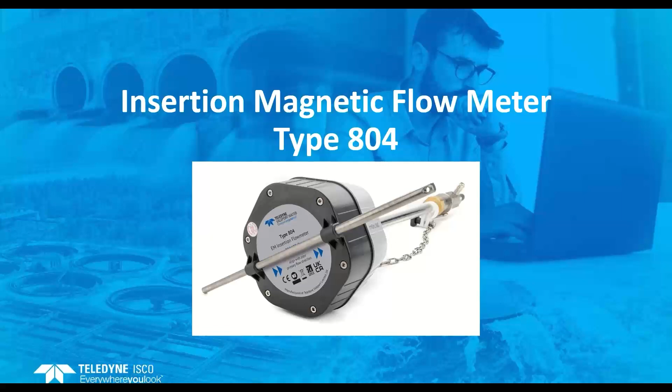Thank you, Kaushal. My name's Matt Brownhill. I've been with Teledyne ISCO for about 5 years now, and I'm the UK Regional Manager. As Kaushal mentioned, we are focusing today on two key products that enhance Teledyne ISCO's product portfolio: the Type 801 handheld velocity current meter, but first up I will be speaking about the Type 804, which is an insertion magnetic flow meter.

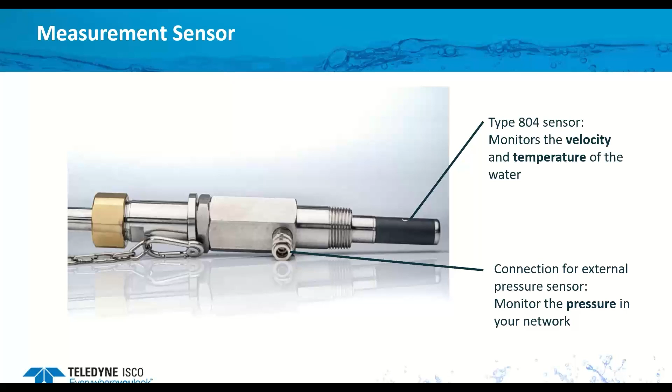So the sensor has three measurement points. The tip has a velocity and a temperature sensor, and in addition to this we have an optional external pressure connection, which is located just above the tip there.

So the principle of operation for the velocity measurement: the sensor adopts Faraday's principle to read velocity. The sensor creates a magnetic field and an EMF voltage is then generated that's proportional to the velocity of the conductor. In this case, water is the conductor. The sensor is inserted into the pipeline, either at the center point or at a 1/8 diameter depth. This all depends on the application and the site specifics.

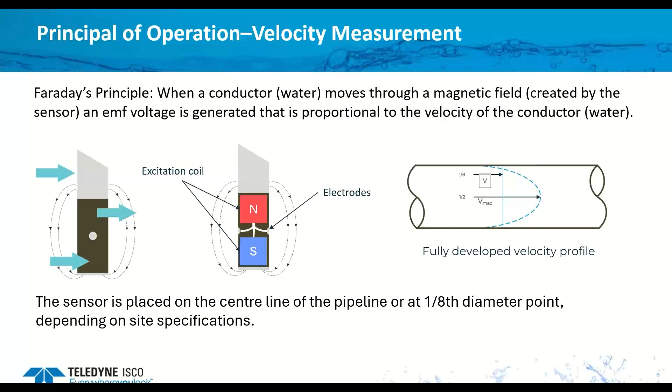Flow is then calculated from the velocity reading. We use a formula to calculate the flow rate: K multiplied by A multiplied by V. K is the constant, determined by multiple factors such as the insertion depth, the pipe size, the pipe shape, and it is generated via the software used when programming and commissioning the unit. A is the area, the internal cross-sectional area of the pipe, calculated from the pipe shape and the pipe diameter. V is the velocity measurement that is being measured by the sensor itself. Flow rate, Q, is then calculated and recorded by multiplying the constant, the area, and the velocity.

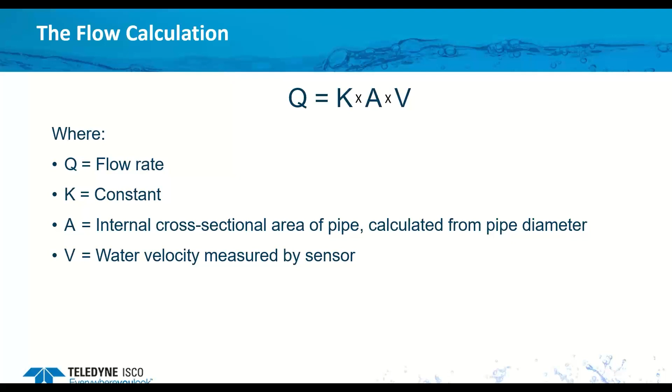So I'll go through the different parts of the Type 804 sensor. First up, you have the alignment spar, which is located right at the top. This can be used to align the sensor to be in line with the oncoming flow in the pipe. A safety chain is installed to prevent the sensor from being ejected from the pipe. This can cause damage to the sensor, or in a worst case, it could cause injury to the operators. So always use the safety chain.

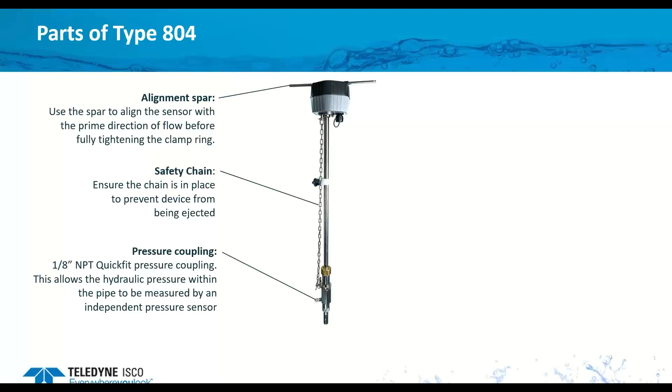There's a pressure coupling, which is external and sits outside the pipe. It enables the hydraulic pressures to be measured by an independent sensor if applicable. The sensor is the small black bit at the end with the circle on there, the electromagnetic sensor that is inserted into the pipe. At the top, you have the electronics, all located in the IP68 housing at the opposite end of the insertion rod. Then there's the connector, which can be used for external power and also for commissioning and programming the unit, in addition to downloading the data to laptops.

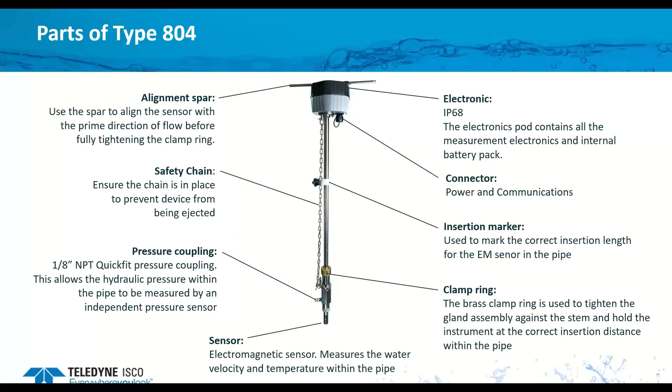Then a bit further down the rod, you have the insertion marker. This is used to mark the correct insertion length for when you're putting it into the pipe. Down at the bottom, you have a clamp ring, which is used to tighten against the insertion marker to ensure that the sensor remains at the correct depth inside the pipe.

Here's an example drawing of the sensor installed. You can see that the brass clamp ring is tight against the insertion marker. The safety chain is in place and the sensor has been inserted into the pipe with everything else remaining external to the channel.

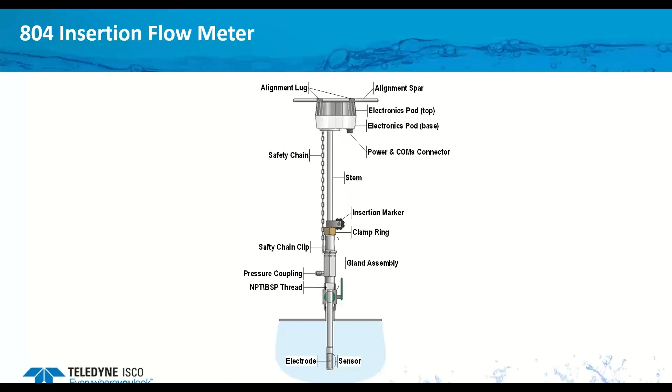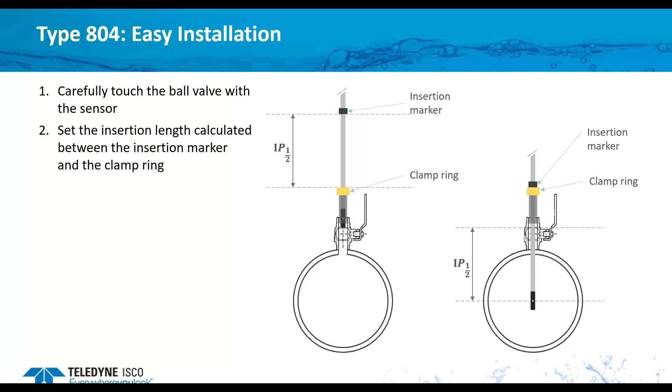Another example here of how to install the sensor. First, you carefully slide the sensor tip to touch the ball valve that is installed on the pipe. You then move the insertion marker to the set insertion length. This should be the length of half the pipe diameter between the clamp ring and the insertion marker, assuming that you are installing it in the center of the pipe.

Then you tighten the marker in place, and then you begin to slowly insert the sensor into the pipe until the clamp ring meets the insertion marker. Once they meet together, you can then tighten the ring to keep it in place, and then you align the sensor using the alignment spar on top of the IP enclosure.

Once that's done, you secure it with the safety chain, and then consider if you are installing at the 1/8 of the depth that you need, perform the steps above, but the initial step is calculated accordingly with the pipe diameters. So the insertion marker would be a bit lower down, and then you'd clamp it into a different position on the pipe depending on how far into the channel that you need to insert it.

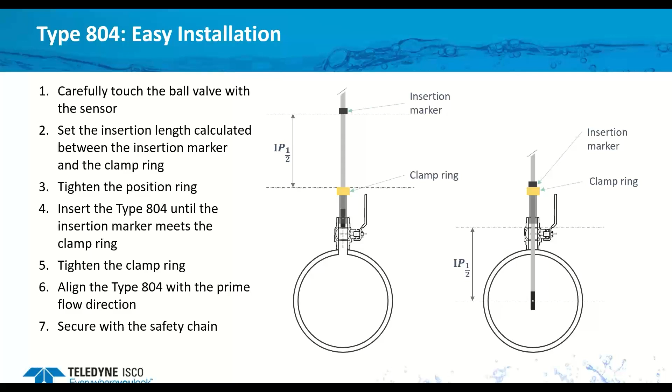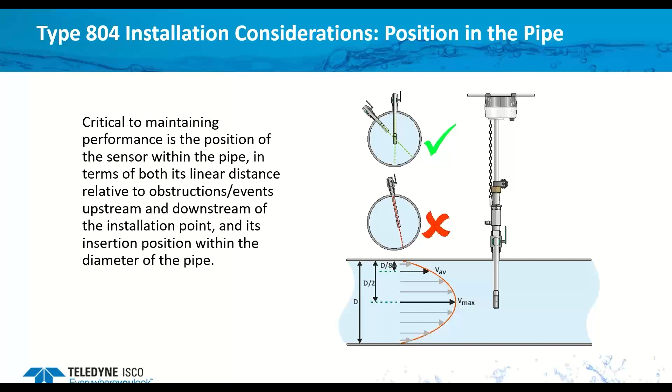Other considerations are obstructions upstream and downstream. As with many velocity measurement sensors, we need to consider both upstream and downstream obstructions. Downstream of the sensor in this application is generally 5 times the pipe diameters. Upstream does need further consideration, and it all depends on the application that you have.

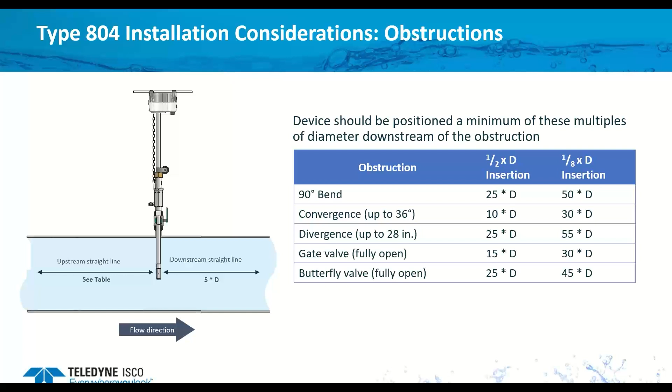The unit is extremely low powered with a typical battery life of around 4 years. The battery version uses two 19 amp hour lithium batteries. We also have analog and digital outputs available with open protocols that are compatible with many third-party loggers and SCADA or data acquisition systems.

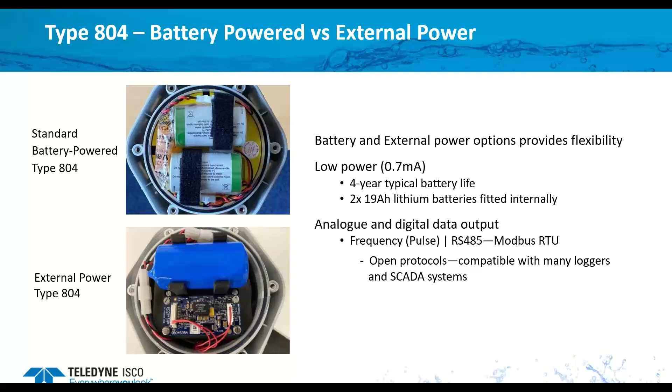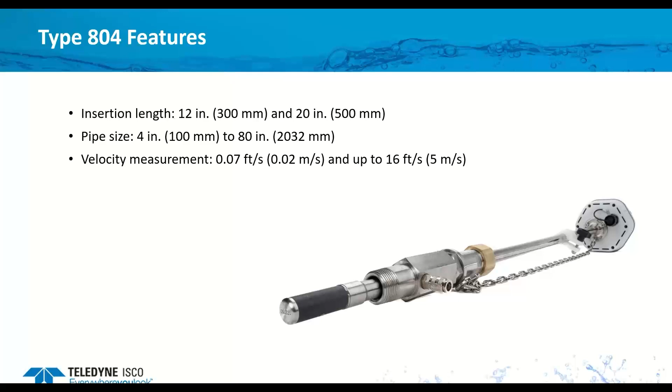This slide will summarize the sensor specifications. We offer two insertion lengths, 12 inches or 20 inches. This enables installs in pipes ranging from around 4 inches all the way up to 80 inches. The velocity measurement range is 0.07 feet per second up to 16 feet per second, and we have an accuracy of plus or minus 2%.

The sensor also has bidirectional flow capabilities, and it can be recorded to display the net totals. So if you do have reverse flows coming, the total volume will show the net total that's gone through the pipe or back up of the pipe. There's also an inbuilt temperature sensor and the optional pressure sensor coupling just above the tip.

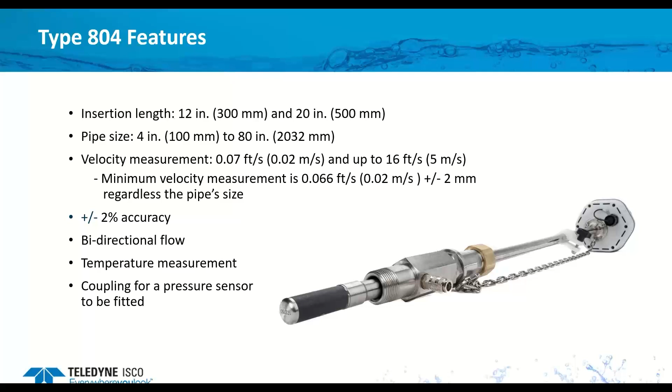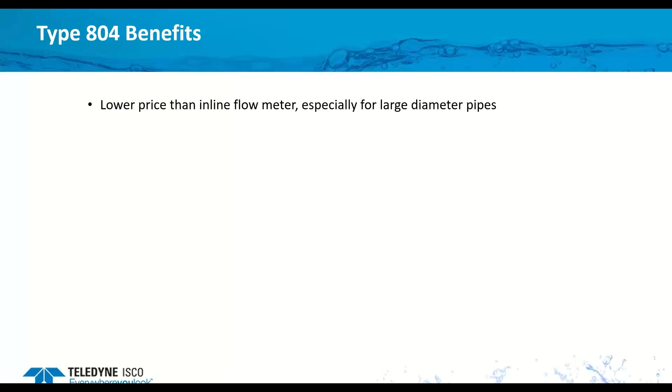So the benefits of using the 804 is it's lower cost than an inline flow meter such as a mag flow meter, especially in larger diameter pipes. There's also lower installation costs. It's a hot tap type installation, so you don't cut a section of the pipe out to install it.

This means that you don't have to stop the flows, empty the pipe, divert the flows, overpump, or anything like that. The cost implications, particularly in larger pipes for mag meter installations, can be extremely expensive.

Lower maintenance costs. Some issues you can see with inline flow meters are liner leakage, for example. The removal of the sensor is easy as well. It's carried out in live flow conditions, and in most cases just requires a sensor clean. Many inline flow meters require calibration back at base, so you have to remove it from the line and send it back to the factory, which introduces all the installation headaches mentioned above. With this system, it's just remove it and reinstall it.

So if you did need to put in a secondary sensor whilst that one goes back to the factory for calibration, you can just slide the new sensor straight back into the line. It also comes with a factory 3-year warranty as standard.

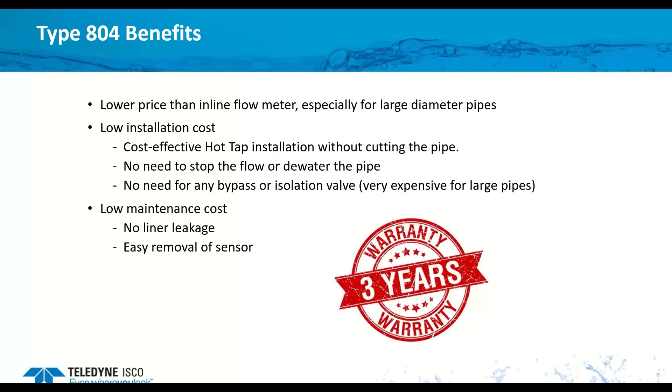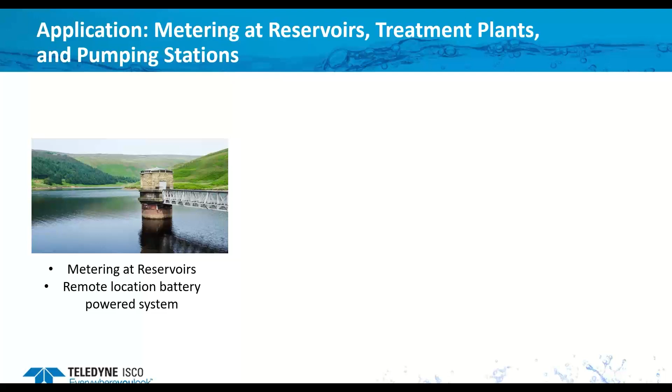I'll go into some application examples you can install. First, metering at reservoirs. Utilizing the battery power option in these remote locations, you don't need to feed any mains power to the unit. You've got a 4 year battery life, so it's ideal for those remote locations.

There's water treatment plants, which often have large pipes, and going back to the installations on inline meters, this can be a much more cost-effective solution.

And then pumping stations, so you'll have pump flows, usually have mains power available on these types of sites, so an external power option would be suitable. Again, you don't need to be cutting into the pipe, you can just install it straight into the pumped flows.

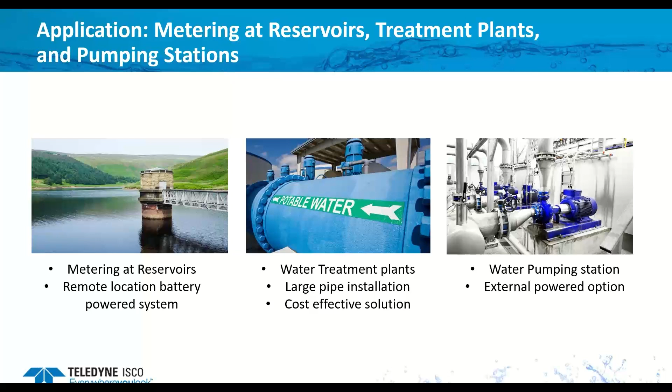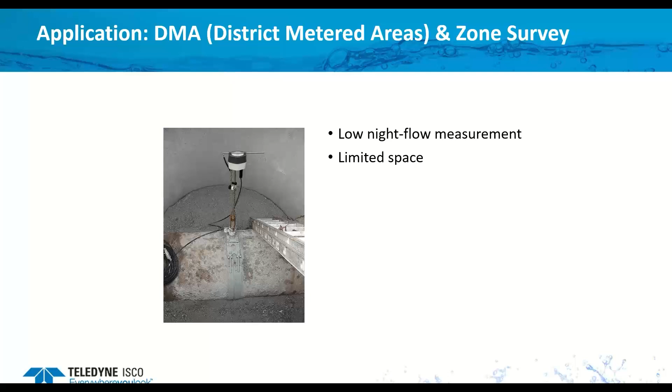Another example is DMA, district metered area. These types of areas typically have low nightly flow, limited space, usually inside a manhole with a pipe running through. It's an easy application, an easy installation even - you just slide it into the pipe using the non-return valves.

Power efficient, so with the battery option you install it, you don't need to run mains power, and it will log for around 4 years. Easy maintenance - remove it, clean it, insert a new sensor if this one needs to go back to the factory.

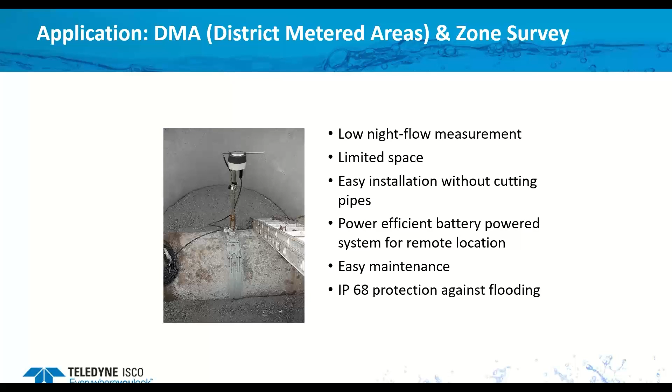The controller enclosure is IP68 rated, protecting in the event of flooding. So if the pipe did split for any reason, it's protected by the enclosure. And then there's the open protocol, as in this application here where there's a manhole chamber - if you can pull the data out to a SCADA or data acquisition system, it removes the need to enter that confined space to download the data.

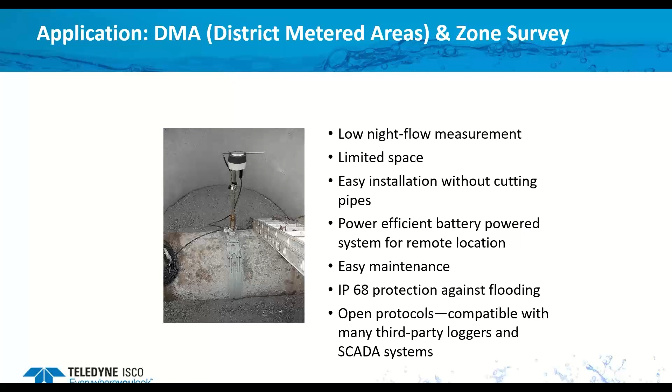It can also be used for non-revenue water or leak detection. Non-revenue water is water that is lost before it reaches the customer, and this is a huge problem. Most water utilities lose around 20% of their water as NRW. In 2007, the EPA estimated 1.7 trillion gallons of water was being lost per year, equivalent to around $2.6 billion. So it's a big problem.

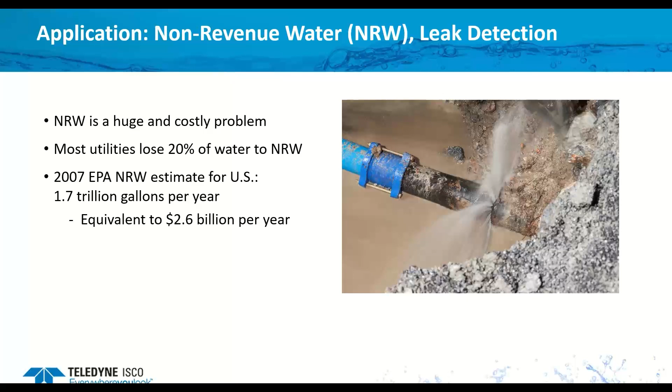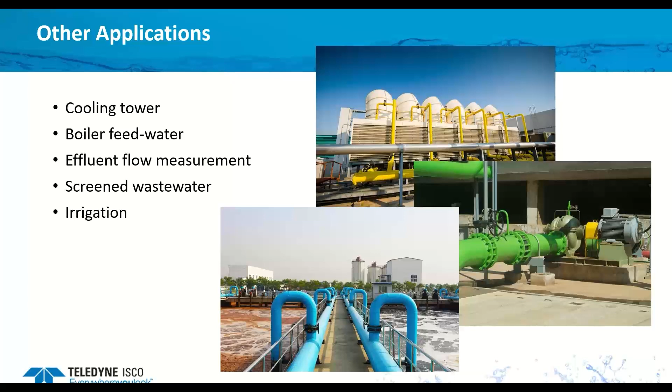So that's the 804. I'll move on now to the 801, which is a handheld current meter.

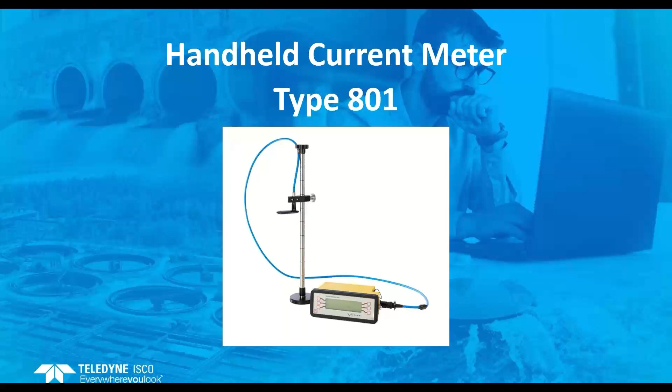The 801 system is made up of the following components: you have modular wading rods, which are for measuring the different depths of the water. The rods are around 20 inches in length and have half-inch increments so that the sensor can be positioned accordingly in the channel or the river.

There's two base options available. We have a flat disc, usually used in man-made channels which are nice and flat, or we have the pointed tip. This would enable you to dig the base into a riverbed or stream bed, so you can hold it in place more securely.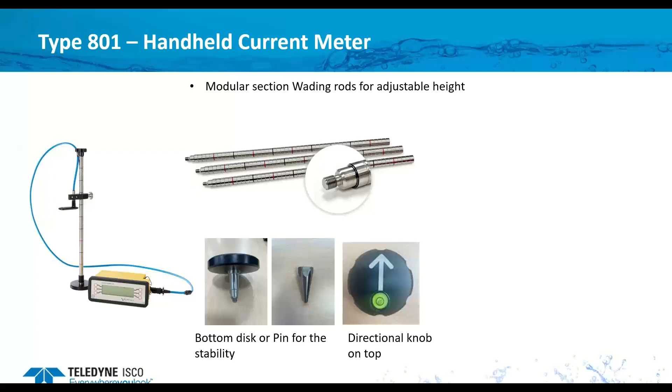At the top of the wading rods, you then have the directional knob. This is similar to the alignment spar that I mentioned on the 804. It enables you to point the sensor into the oncoming flow. It also features a spirit level, so you can ensure that the sensor is in a horizontal position.

Then we have the controller with an LCD display. Live readings can be shown. This also has data storage capabilities, which can be set and programmed to different logging rates. The controller comes with a shoulder strap, so if you're wading in the river, you don't have many hands to hold everything with. This can sit over your shoulder, so then you can have both hands on the wading rods.

And then all of the items, they come delivered in a purpose-built Peli case. This is easy for transportation and obviously storage. It all goes back in the box and on the shelf.

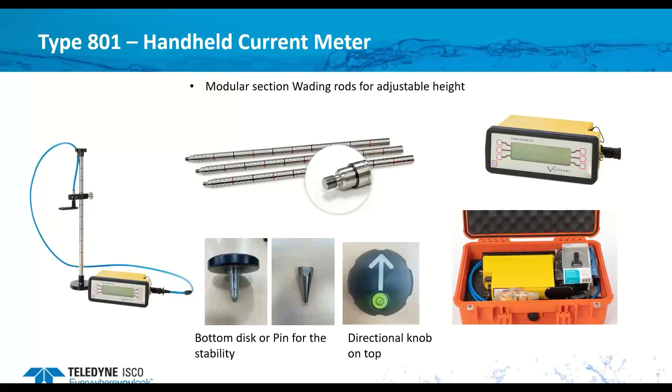The principle of operation is the same as the 804. It adopts Faraday's principle, although this is a velocity-only measurement. The sensor can be positioned at the desired location with the wading rod increments.

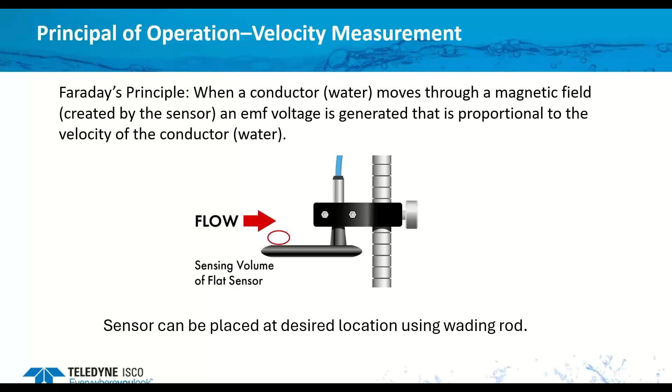You can see the increments there on that drawing. Each one of those is half an inch, and you can just raise or lower the sensor accordingly and tighten it back into position. And then the sensor should always point in the direction of the incoming flow.

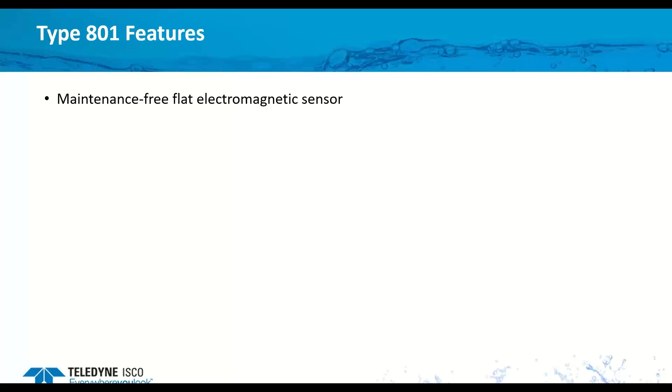So onto the features of the 801. It's a maintenance-free sensor — just wipe it clean, put it back in the box, and it's ready for next time. It has a velocity range of minus 16.4 to positive 16.4 feet per second. The accuracy is plus or minus 0.5%.

The minimum depth of water required for operation is 2 inches. The wading rods, as mentioned, are modular. They have threaded ends to adjust the height accordingly, and you can keep connecting these to the desired length.

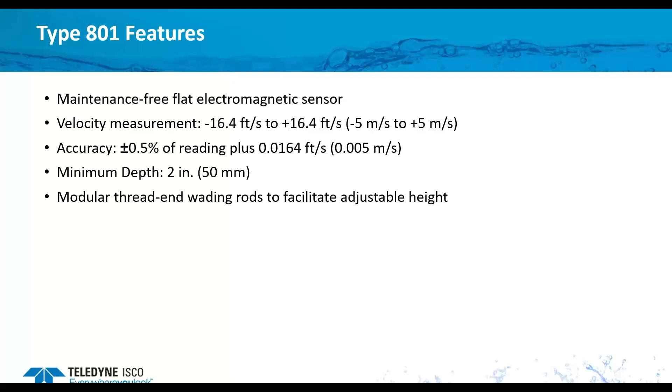The controller is easy to program. It has onboard data storage. It's also handheld. It displays live readings if you don't need the data storage. If you're just looking for spot readings, it's got that display on there as well.

And it comes in 2 different cable lengths. You've got a 6-foot cable length, which is for measuring velocity whilst you're standing in the channel, such as a shallow river or a stream if you're wading through it. Or we have the 20-foot cable length, which is more for when you're taking readings off a bridge or maybe above an underground sewer in a manhole or something like that. So you've got the wading rods and the extra cable length to reach down to the water.

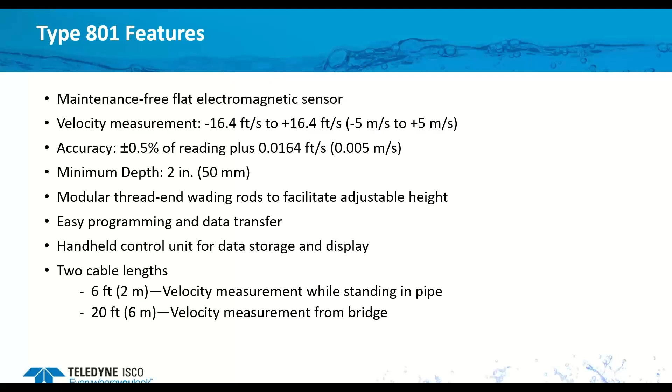The applications, two main applications, are river profiling and velocity cross checks. Speaking about the velocity cross checks, many sensors that do measure velocity can't be field calibrated. You can check the depth quite easily with a ruler or something like that, but the velocity you can't really check. So the 801 provides that cross check. You can dip it into the same channel and get that cross check of velocity, checking it against the installed instrument that you've got on site already.